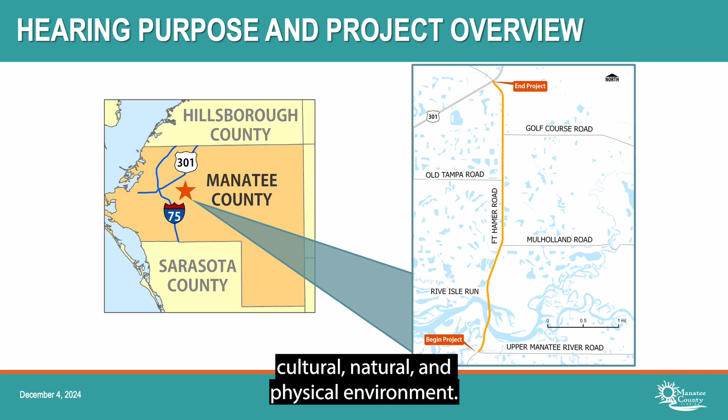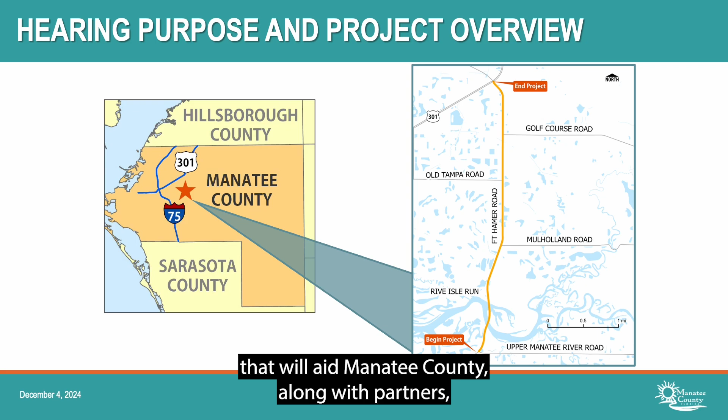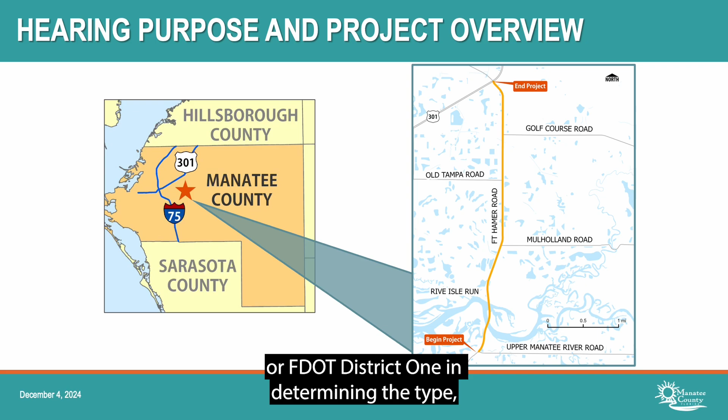The purpose of this PD&E study is to evaluate engineering and environmental data and document information that will aid Manatee County, along with partners Sarasota-Manatee Metropolitan Planning Organization, or MPO, and Florida Department of Transportation, or FDOT District 1, in determining the type, preliminary design, and location of the proposed improvements.

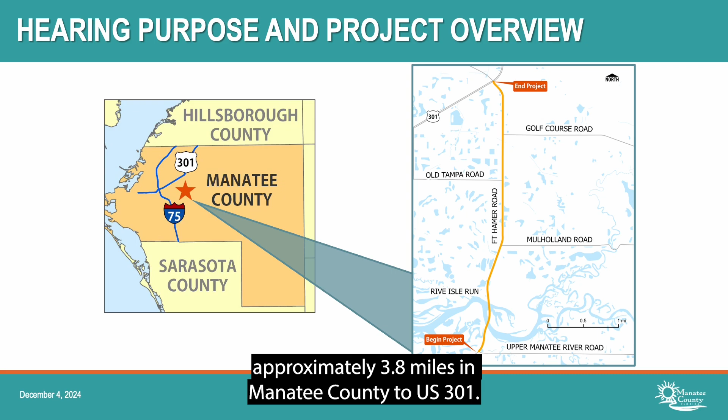The study begins at Upper Manatee River Road and extends approximately 3.8 miles in Manatee County to US 301. The county proposes to widen this segment of Fort Hamer Road and add multimodal accommodations for all users.

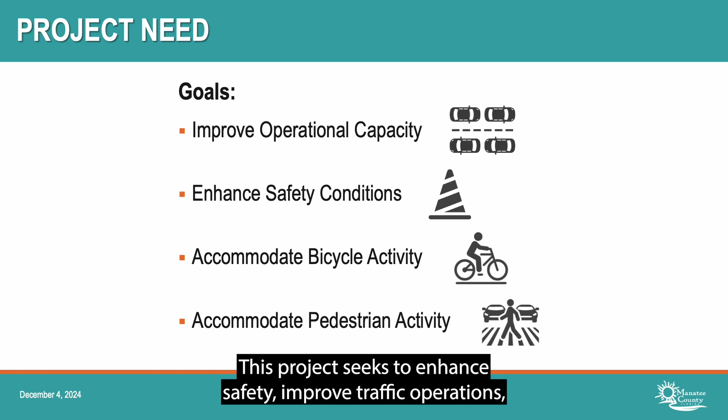The need for the proposed improvements for Fort Hamer Road is based on population and traffic growth in the area and the region as a whole. Fort Hamer Road is an important north-south connection in the region, serving as an alternative to I-75, providing connectivity between central Manatee County and US 301 in Parrish. This project seeks to enhance safety, improve traffic operations, provide multimodal access, and meet future transportation demands in Manatee County.

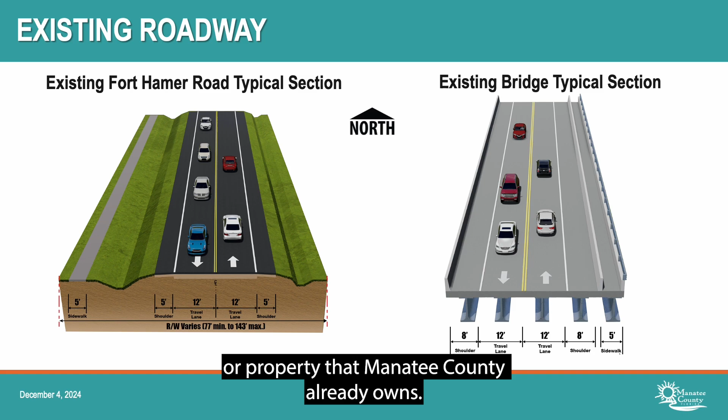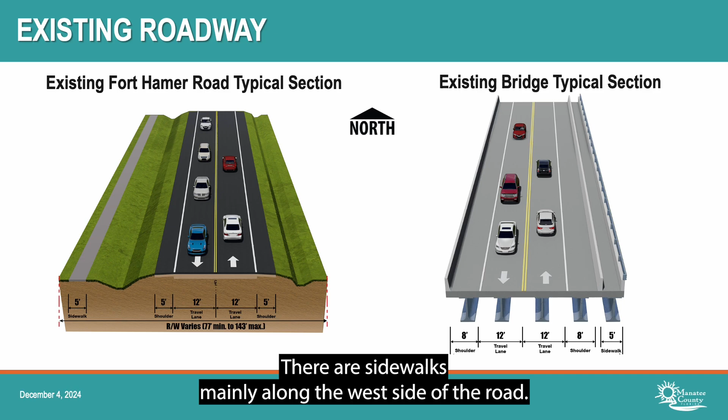Within the project limits, Fort Hamer Road is a two-lane undivided roadway with 12-foot lanes and intermittent right turn and left turn lanes. There are generally 5-foot paved shoulders on each side of the roadway, within at least 77 feet of existing right-of-way or property that Manatee County already owns. Stormwater runoff is collected in roadside ditches. The posted speed limit is generally 45 miles per hour. There are sidewalks, mainly along the west side of the road.

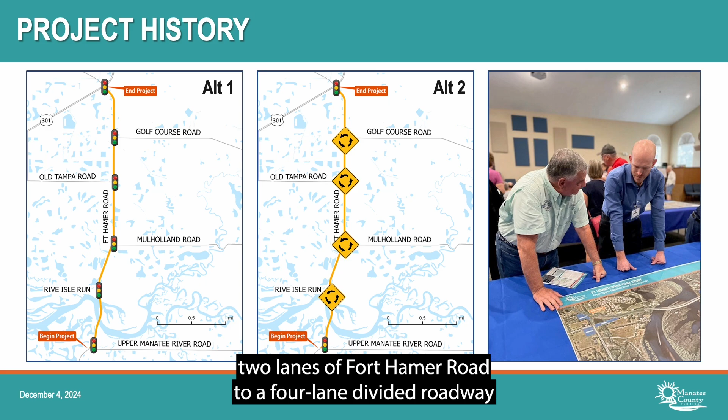Throughout this PD&E study, Manatee County has looked at different concepts to widen the existing 2 lanes of Fort Hamer Road to a 4-lane divided roadway with a raised median and enhanced multimodal accommodations for all users.

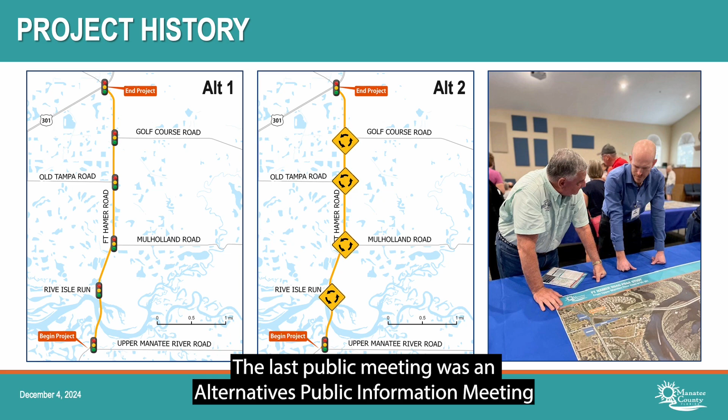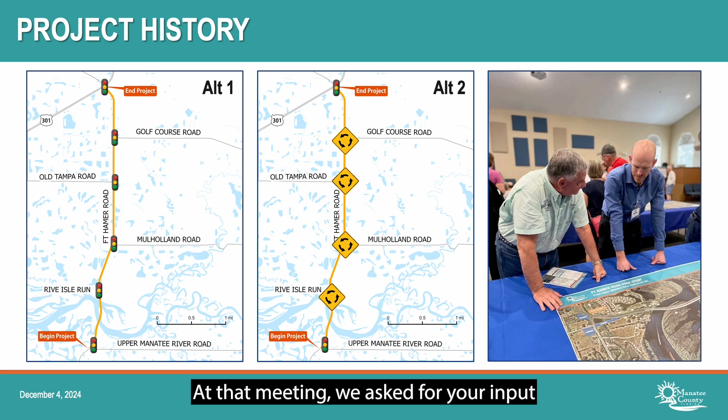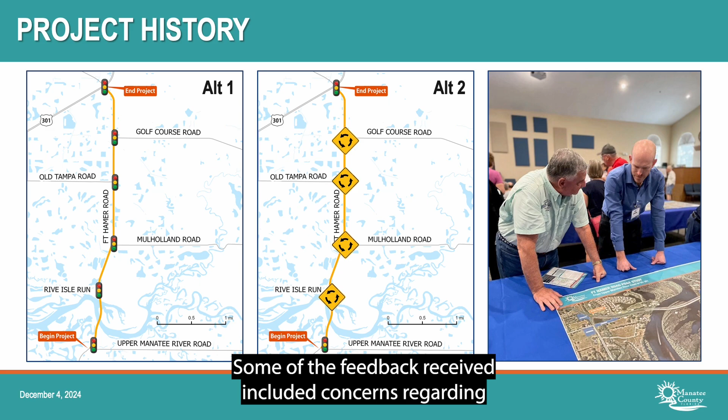The last public meeting was an Alternatives Public Information meeting held on January 25, 2024, in person, and on February 1, 2024, online. At that meeting, we asked for your input on proposed improvements to Fort Hamer Road. The majority of comments received did not express a preference for an alternative. Some of the feedback received included concerns regarding boat and trailer access, noise, and traffic congestion.

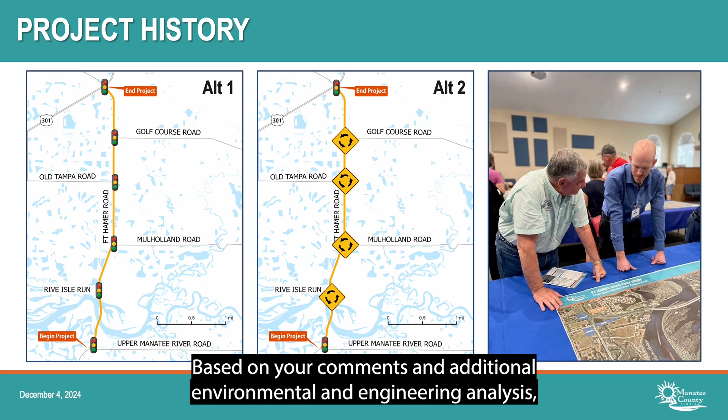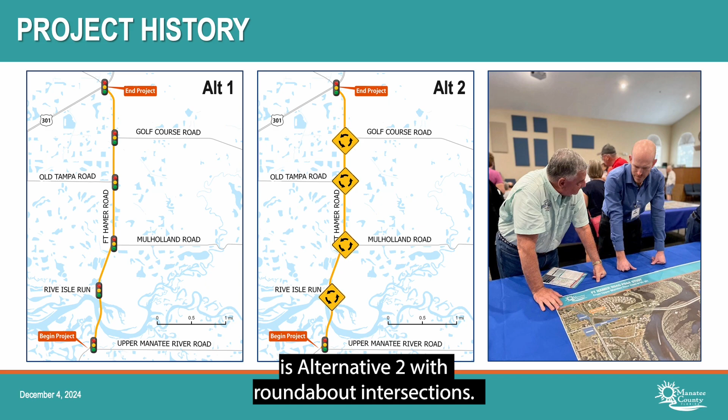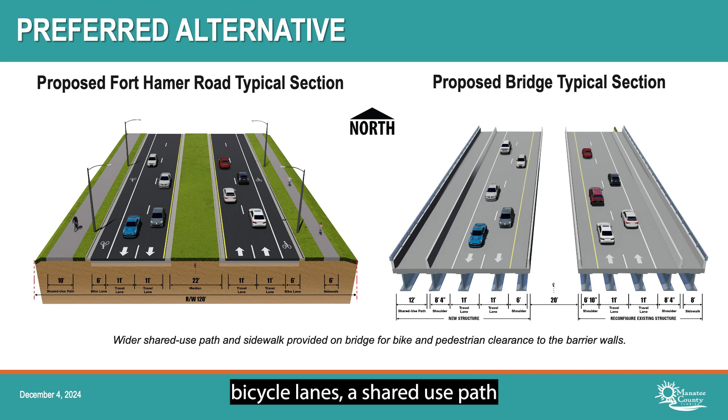Based on your comments and additional environmental and engineering analysis, a preferred alternative was selected for Fort Hamer Road. The preferred alternative for Fort Hamer Road is Alternative 2, with roundabout intersections. The preferred alternative roadway typical section includes a raised median, 2 lanes in each direction, bicycle lanes, a shared use path on one side, and a sidewalk on the other.

The preferred alternative bridge typical section includes a new structure for 2 southbound lanes with a shared use path and a reconfigured existing structure for 2 northbound lanes with a wider sidewalk. The improved roadway will utilize a 40-mile-per-hour posted speed. The preferred alternative includes roundabout intersections at Rive Isle Run, Mulholland Road, Old Tampa Road, and Golf Course Road. Roundabouts have been shown to have safety and traffic operational benefits for all roadway users.

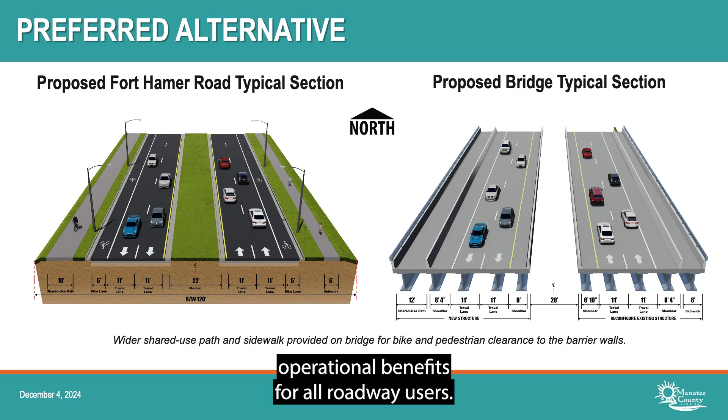Throughout this study, a no-build alternative is also considered. The no-build alternative assumes that no improvements are made to Fort Hamer Road through the year 2050, except for routine maintenance. There are advantages and disadvantages to the no-build alternative. Advantages of the no-build alternative include no impact to the adjacent social, cultural, natural, or physical environments, no utility impacts, and no expenditure of funds for right-of-way acquisition or construction.

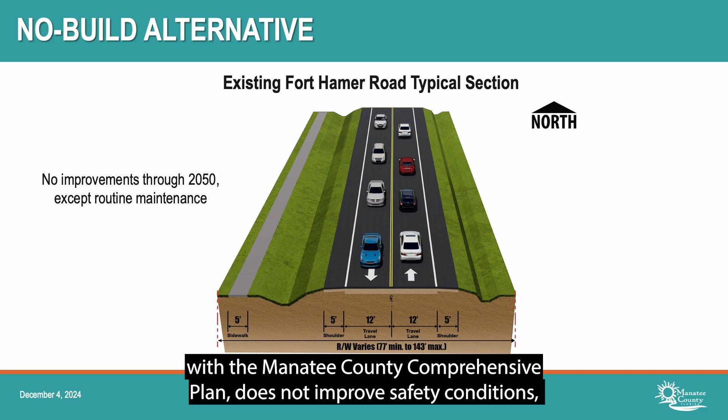Disadvantages include not consistent with the Manatee County Comprehensive Plan, does not improve safety conditions, does not improve pedestrian and bicycle accommodations, and does not improve vehicular traffic operations. The no-build alternative remains a valid option and will continue to be evaluated until the completion of this study.

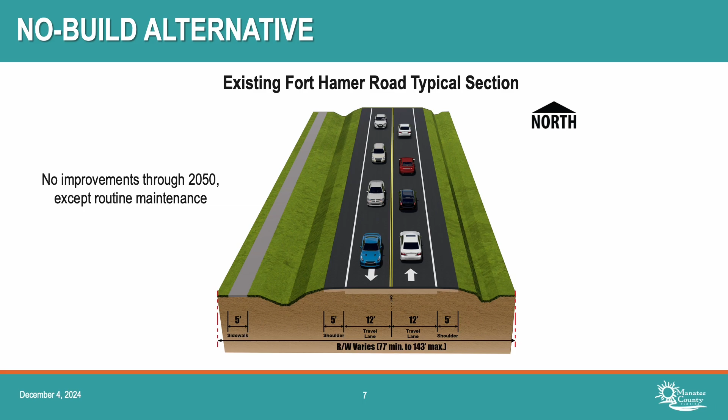Manatee County evaluated environmental and socioeconomic factors relating to proposed widening improvements in accordance with the National Environmental Policy Act of 1969, as amended, and other federal requirements.

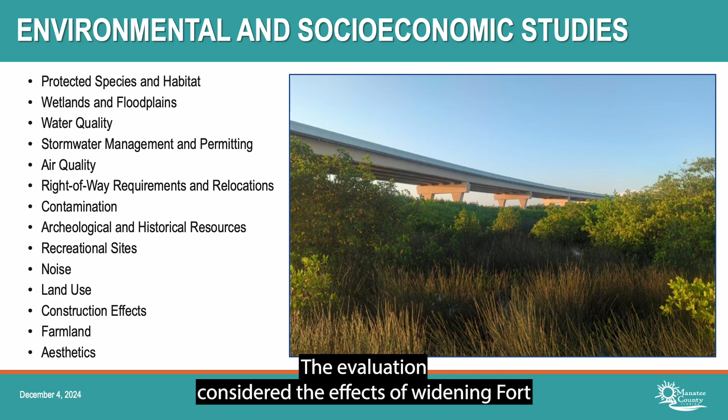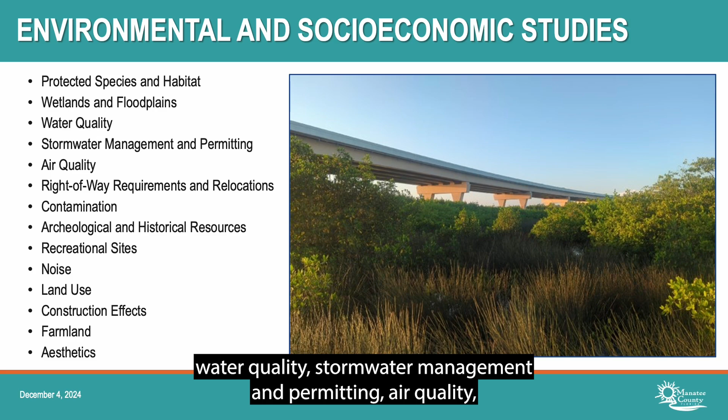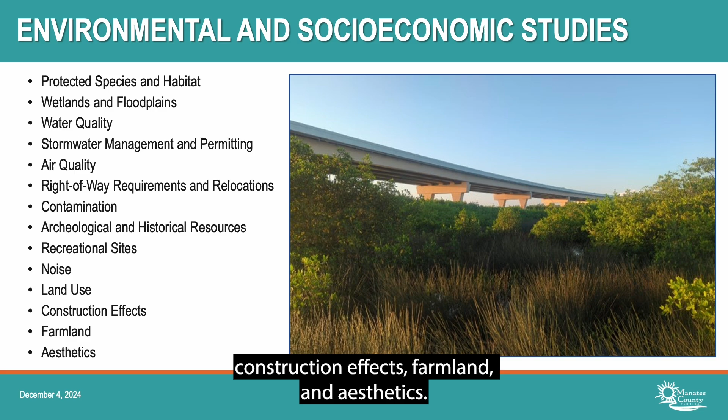The evaluation considered the effects of widening Fort Hamer Road on protected species and habitat, wetlands and floodplains, water quality, stormwater management and permitting, air quality, right-of-way requirements and relocations, contamination, archaeological and historical resources, recreational sites, noise, land use, construction effects, farmland, and aesthetics.

Protected species and habitats are afforded special protection under the Endangered Species Act of 1973 as amended and Florida statutes. Manatee County assessed species within the project limits and through ongoing coordination with U.S. Fish and Wildlife Service has determined that the proposed project may affect but is not likely to adversely affect the existence of certain federally listed threatened or endangered species.

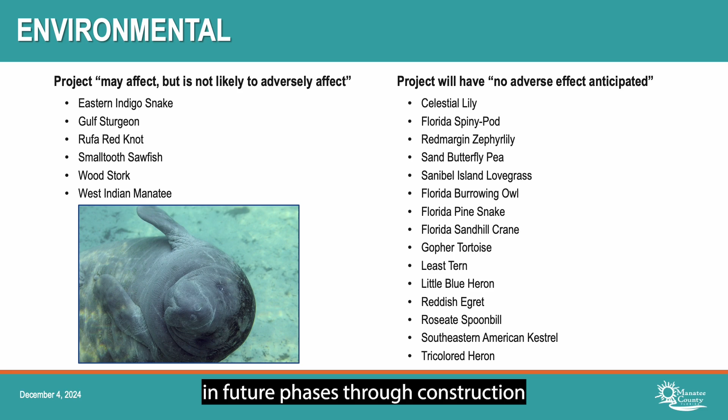In addition to ongoing coordination, Manatee County has committed to reinitiating consultation with U.S. Fish and Wildlife Service and National Marine Fisheries Service during the design and permitting phase of the project for determining impacts to various species and habitats, and developing mitigation measures to offset unavoidable impacts. If the preferred alternative is approved, Manatee County will continue to work closely with environmental agencies in future phases through construction to meet all environmental permitting requirements.

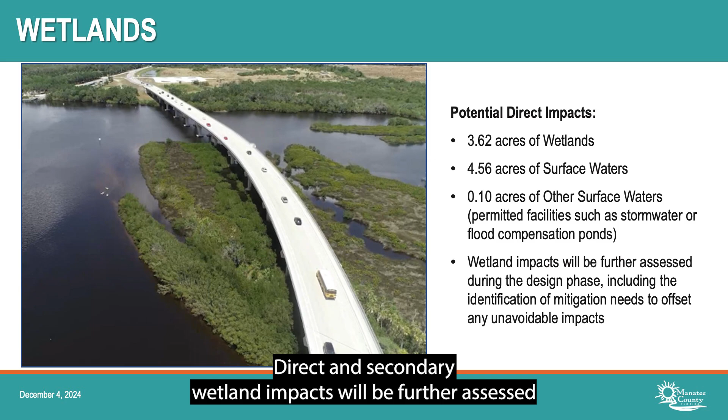Manatee County evaluated wetlands and surface waters within the project study area. Potential direct impacts of the preferred alternative include approximately 3.62 acres of wetlands, 4.56 acres of surface waters, and 0.10 acres of other surface waters. Other surface waters include permitted facilities such as stormwater or flood compensation ponds. Direct and secondary wetland impacts will be further assessed during the design phase for this project and will also include identification of mitigation needs to offset any unavoidable wetland impacts.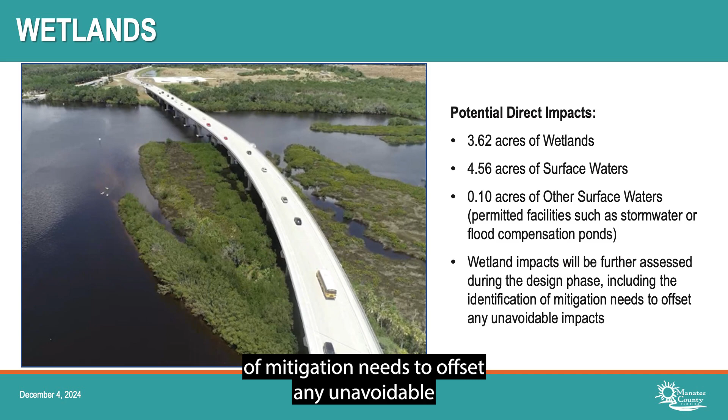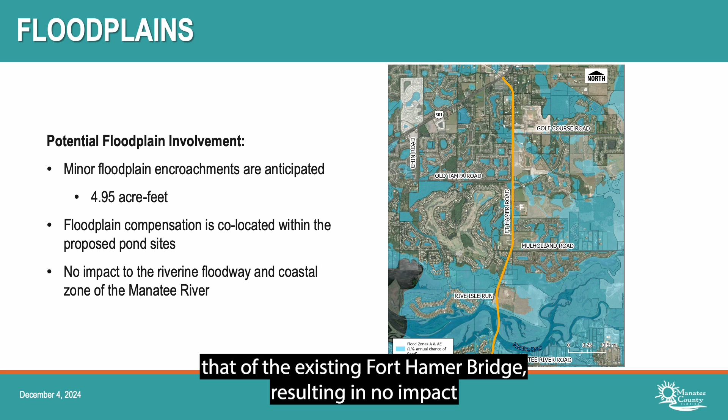Manatee County evaluated potential floodplain involvement within the project study area. The calculated roadway floodplain encroachment of the preferred alternative is 4.95 acre-feet. Floodplain compensation sites have been co-located with pond sites to reduce property impacts. The hydraulic length of the new bridge is proposed to match that of the existing Fort Hamer Bridge, resulting in no impact to the riverine floodway and coastal zone of the Manatee River.

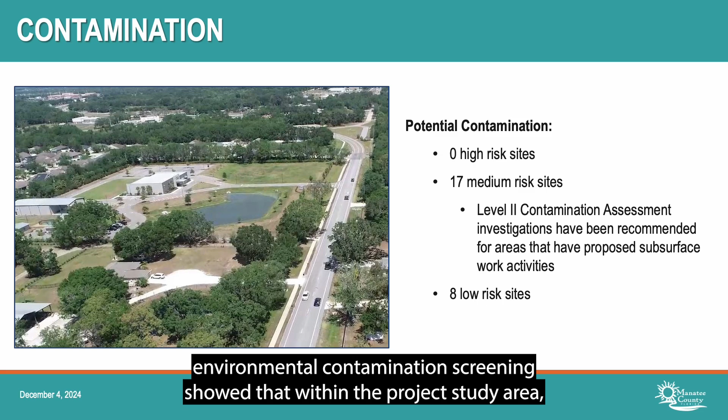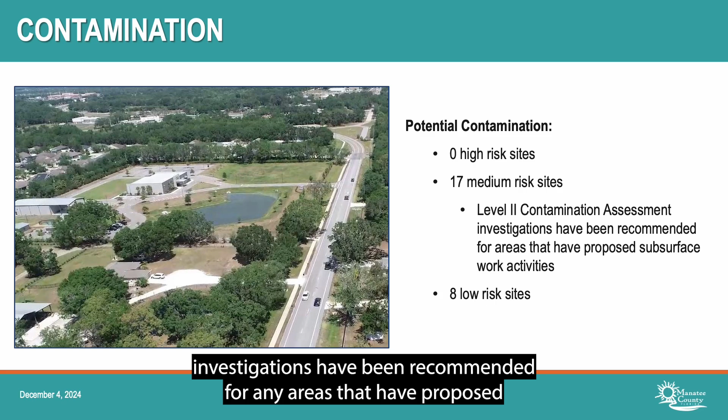Results of the environmental contamination screening showed that within the project study area, 0 sites were ranked high for potential contamination, 17 sites were ranked medium for potential contamination, and 8 sites were ranked low for potential contamination. For the sites with a risk ranking of low, no further action is required at this time. For the sites with a risk ranking of medium, Level 2 contamination assessment investigations have been recommended for any areas that have proposed subsurface work activities like pole foundations or drainage features.

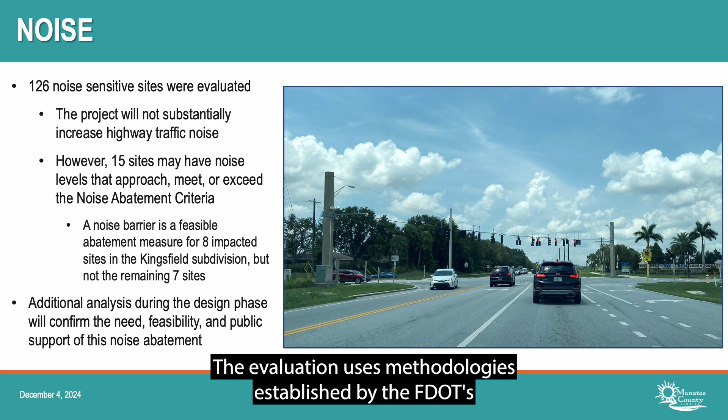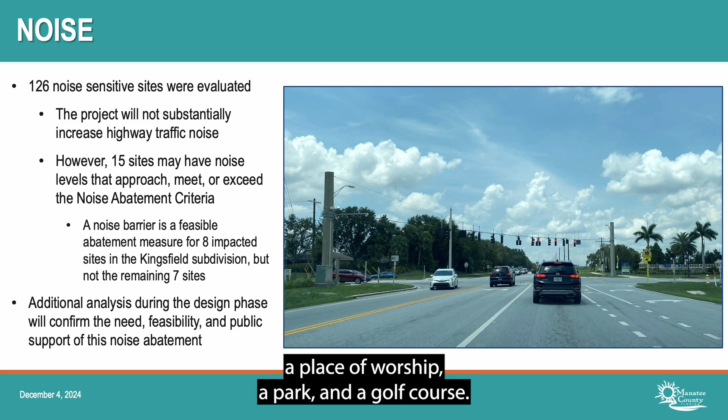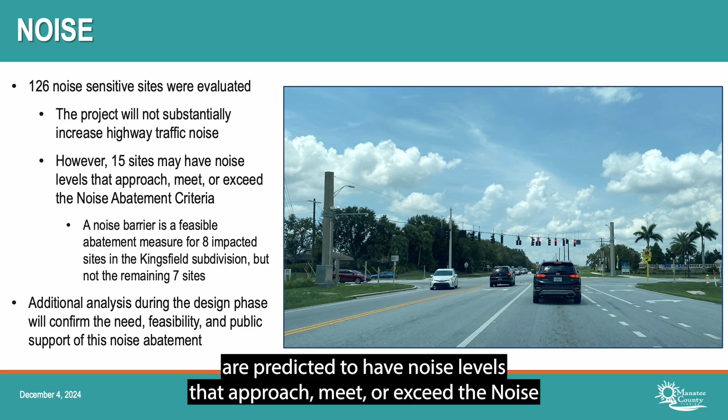A requirement for federally funded projects is the evaluation of highway traffic noise. The evaluation uses methodologies established by the FDOT's Traffic Noise Policy and the FDOT PD&E Manual. A total of 126 noise-sensitive sites were evaluated, representing 121 residences, 2 schools, a place of worship, a park, and a golf course. The results of the highway traffic noise analysis indicate that 15 residences are predicted to have noise levels that approach, meet, or exceed the noise abatement criteria in the future, with the preferred alternative.

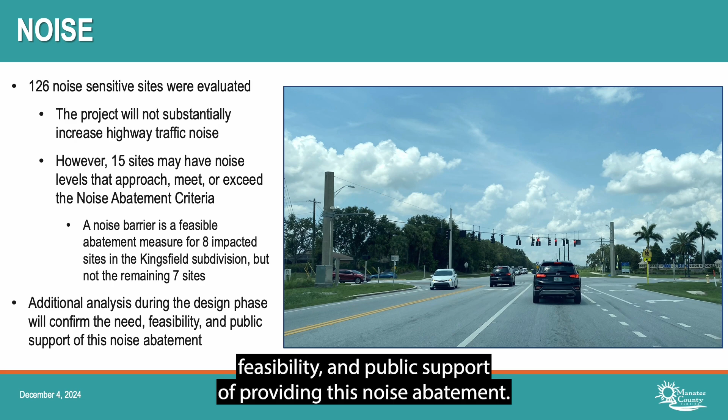A noise barrier is a potentially reasonable and feasible noise abatement measure for the 8 impacted receptors within the Kingsfield subdivision, but not the remaining 7 impacted receptors. Detailed noise analysis and public involvement during the final design phase will confirm the need, feasibility, and public support of providing this noise abatement.

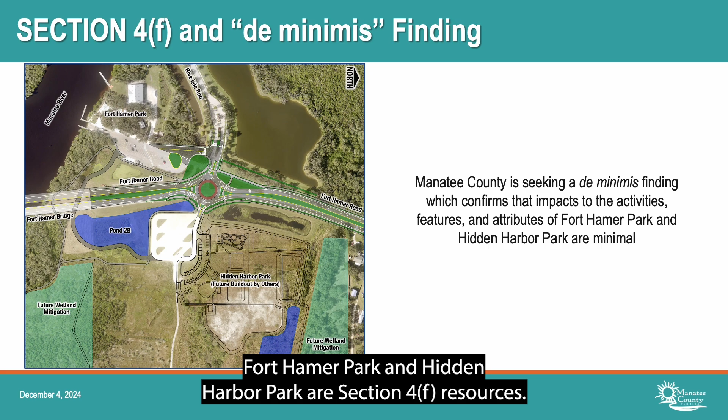Under Section 4(f) of the Department of Transportation Act of 1966, Fort Hamer Park and Hidden Harbor Park are Section 4(f) resources. Based on the overall minor level of impact and implementation of proposed mitigative actions to address potential impacts, the project will not adversely affect the activities, features, and attributes of each property in meeting its intended Section 4(f) purpose.

As such, Manatee County is pursuing a Section 4F de minimis finding for the potential impacts to each resource. This information is available for review tonight. This hearing provides the opportunity for public comment on the project's impact to Fort Hamer Park and Hidden Harbor Park.

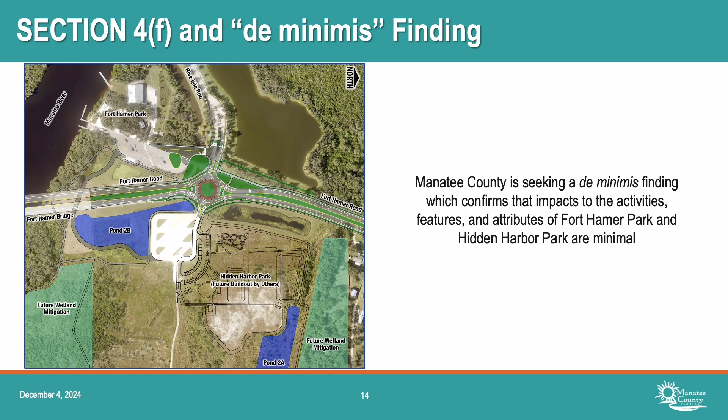A cultural resource assessment survey was conducted in accordance with Section 106 of the National Historic Preservation Act of 1966 and Florida statutes. Based on the results of the research and field investigations, no archaeological sites or historic resources that are listed, eligible, or that appear potentially eligible for listing in the National Register of Historic Places are located within the project area of potential effects. The preferred alternative will result in no historic properties affected.

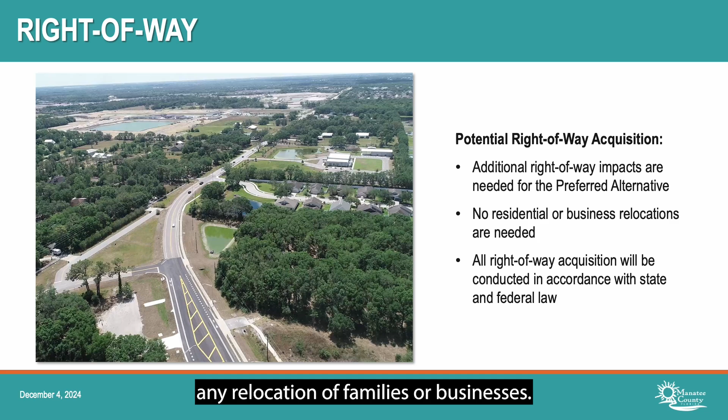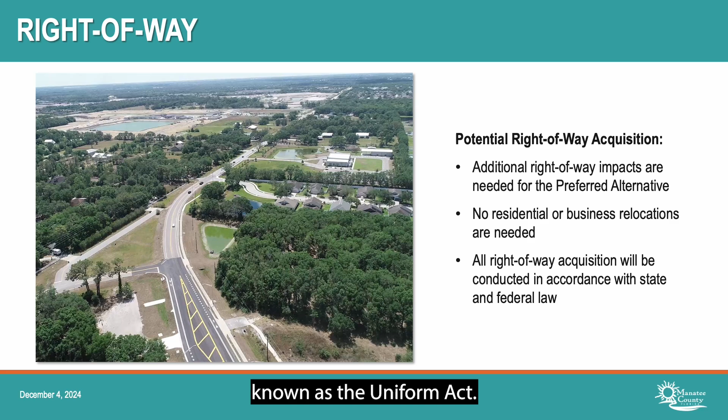Manatee County has identified right-of-way impacts needed for the preferred alternative. However, this project will not cause any relocation of families or businesses. All right-of-way acquisition will be conducted in accordance with Florida Statute 339.09 and the Federal Uniform Relocation Assistance and Real Property Acquisition Act of 1970, commonly known as the Uniform Act. The county right-of-way specialists who are supervising this program will be happy to answer any questions you may have.

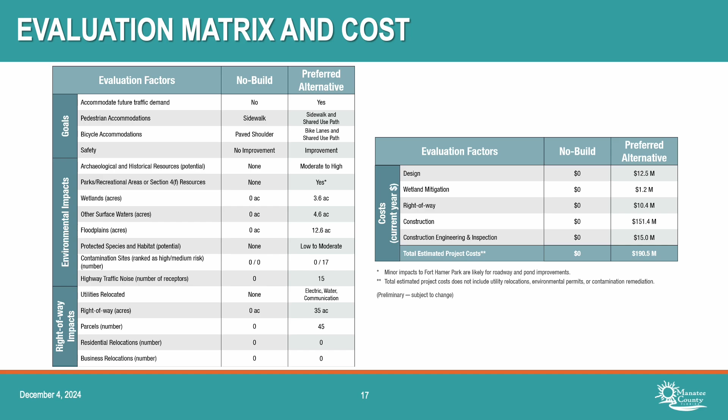An evaluation matrix showing a detailed comparison of the preferred alternative and the no-build alternative is provided in the project handout and is also on display here this evening. The matrix shows potential effects to the social, cultural, natural, and physical environments and identifies preliminary costs.

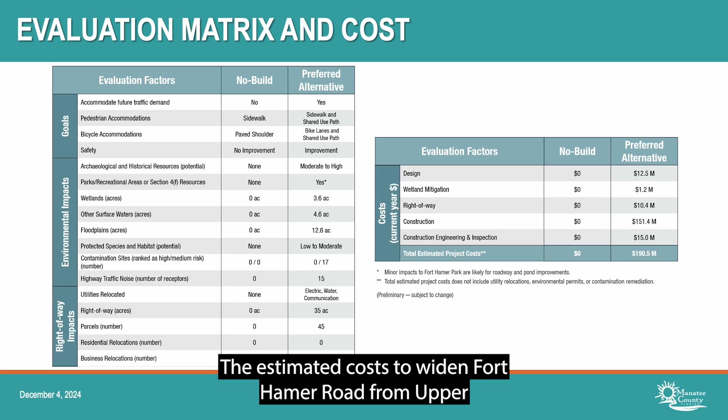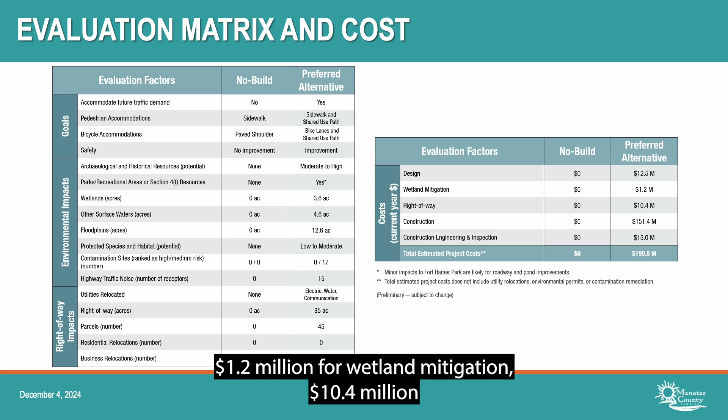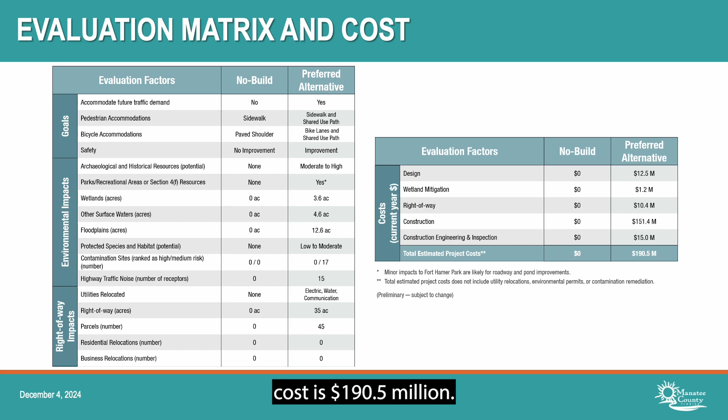The estimated costs to widen Fort Hamer Road from Upper Manatee River Road to US 301 include $12.5 million for final design, $1.2 million for wetland mitigation, $10.4 million for right-of-way acquisition for roadway and stormwater management areas. The total estimated construction cost for the project is $151.4 million. The cost for construction engineering and inspection is estimated at $15 million. The county's preliminary estimate of total project cost is $190.5 million.

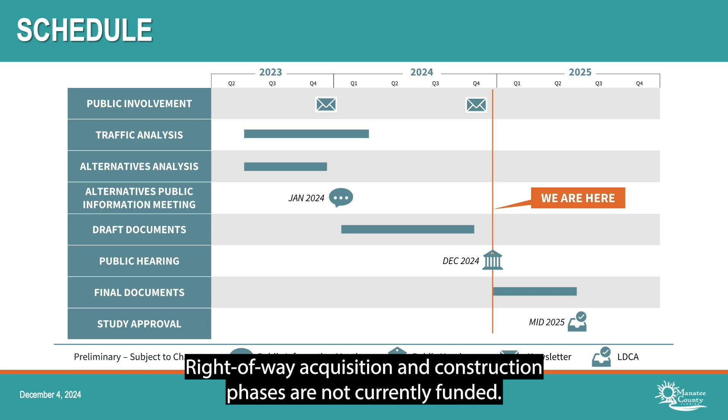At this time, Manatee County has funding through the design phase. Right-of-way acquisition and construction phases are not currently funded. The county anticipates completion of this PD&E study by mid-2025. The study schedule is on display this evening.

We encourage you to review project information tonight and provide us your feedback. All comments should be submitted or postmarked by Monday, December 16, 2024, to become a part of the formal hearing record.

All hearing materials presented tonight are available to the public on the project webpage and will remain posted for your review. The technical documents are also available for review in person at the Rocky Bluff Branch Library, 6750 US 301 North, Ellenton, Florida, 34222, or at the Palmetto Branch Library, 923 6th Street West, Palmetto, Florida, 34221, until Monday, December 16, 2024. You may also visit the project website at www.forthamerroad.com for the latest study information, schedule, and upcoming events.

This PD&E study is being conducted and completed according to the requirements of the National Environmental Policy Act and other related federal and state laws, rules, and regulations, which will qualify future phases of this project for federal funding, and this hearing was advertised consistent with those requirements. Please see the statute display board for all other applicable requirements.